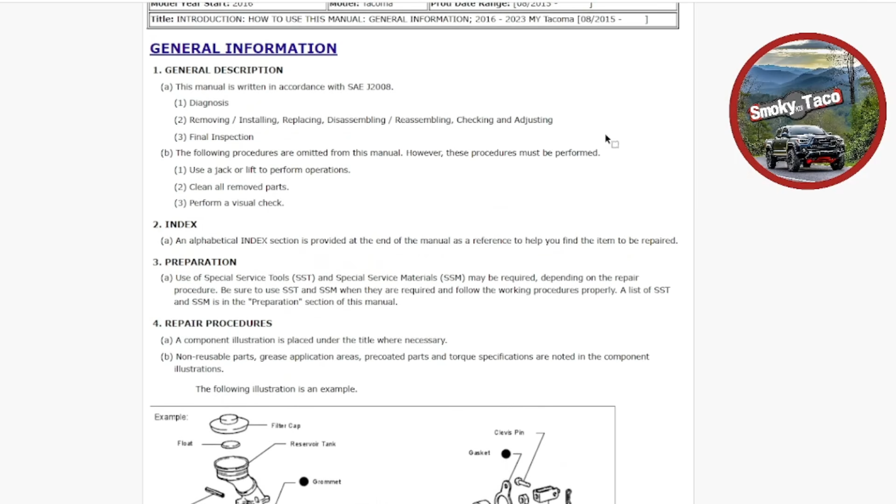If you work on your own Tacoma, this is the tool that keeps you from guessing. This is the repair manual every 3rd gen Tacoma owner should have, and the 4th gen is coming soon. This isn't a summary or a shortcut, it's the real workshop manual.

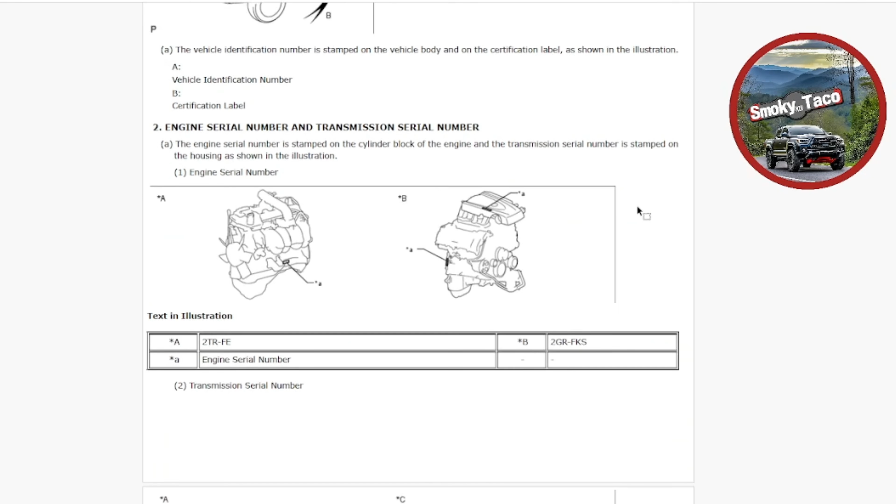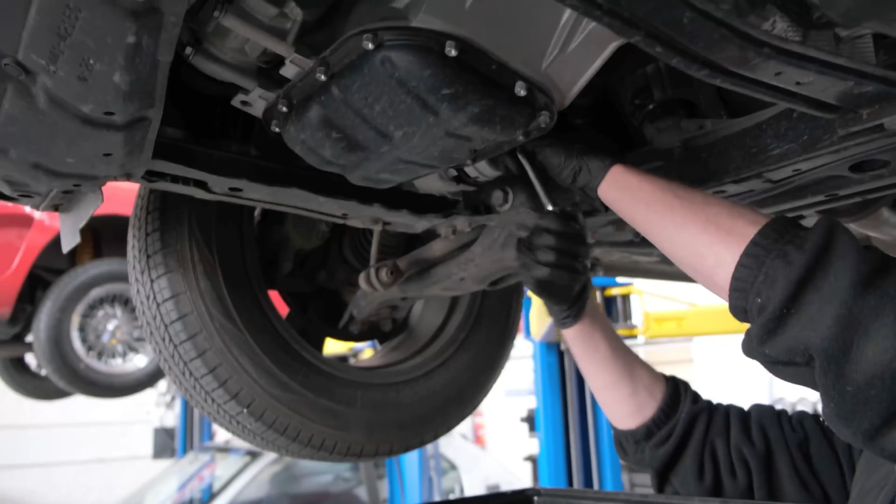If you install mods, do maintenance, or troubleshoot issues on your Tacoma, you already know the problem. YouTube skips steps, forums argue, and guessing costs money. So today, I'm walking through the exact PDF service manual I use to plan jobs, double check specs, and avoid mistakes before I touch anything.

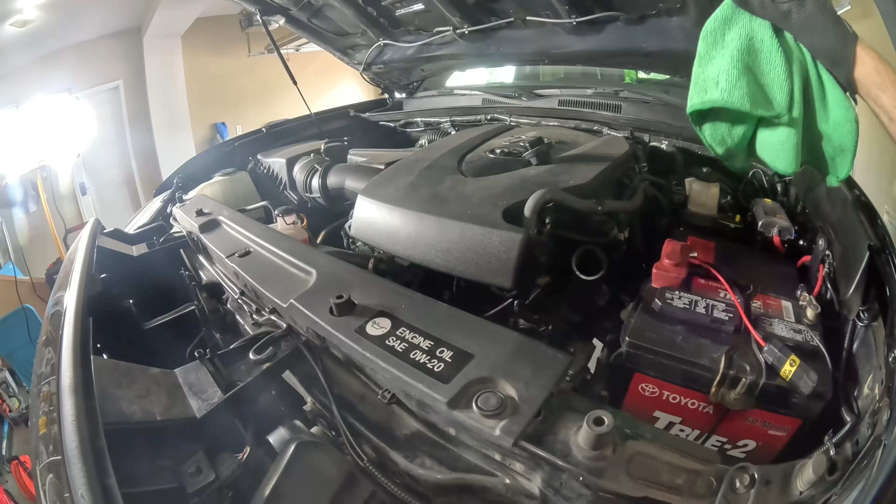This is a Toyota Tacoma service and repair manual from eManualOnline. It's a full factory style workshop manual. It includes step-by-step repair procedures, factory torque specs, electrical wiring diagrams, exploded views of components, and diagnostic flowcharts. This is the same level of information professional techs and dealerships use.

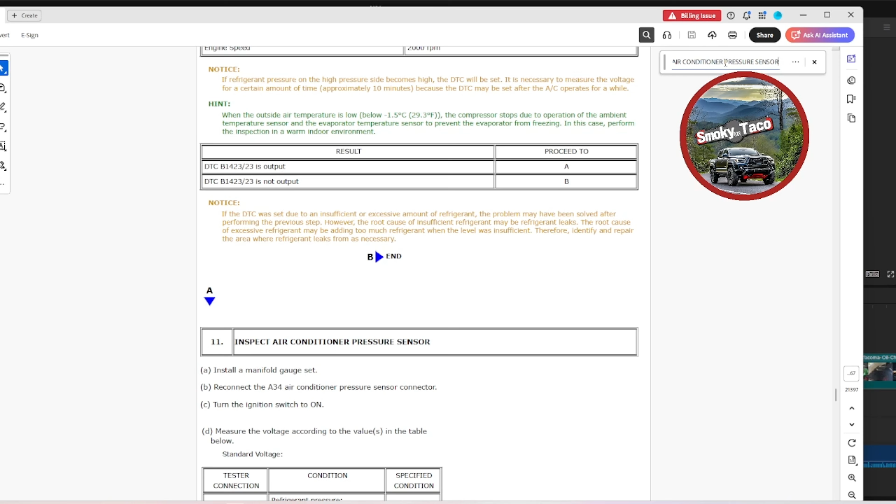Getting it is simple. Go to eManualOnline.com, select Toyota, choose Tacoma, pick your year, and download the PDF. Once you have it, it works on a tablet, phone, or laptop, and it's searchable, printable, and usable offline.

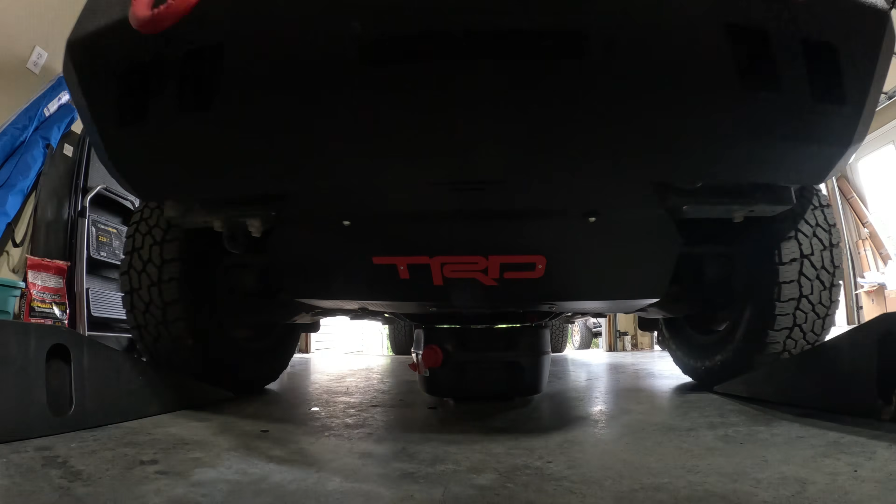Let me show you how I actually use this, even when I'm not actively wrenching. Most mistakes happen before the job even starts. This lets you plan instead of guess.

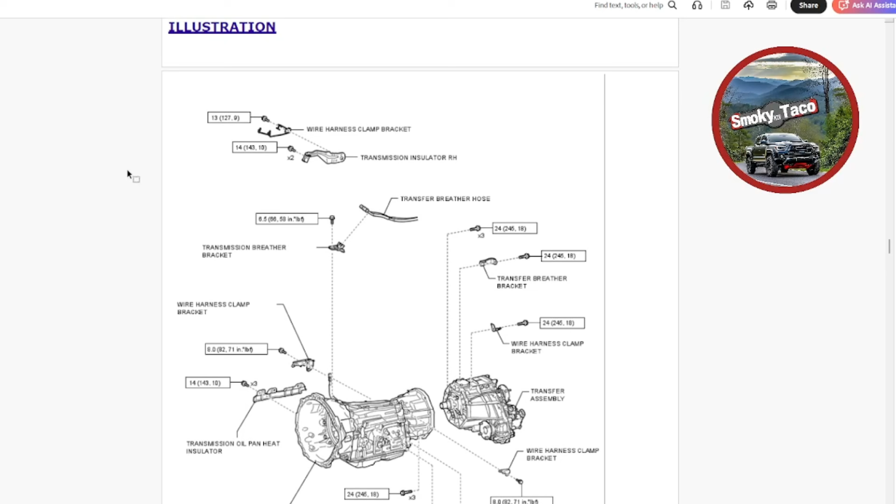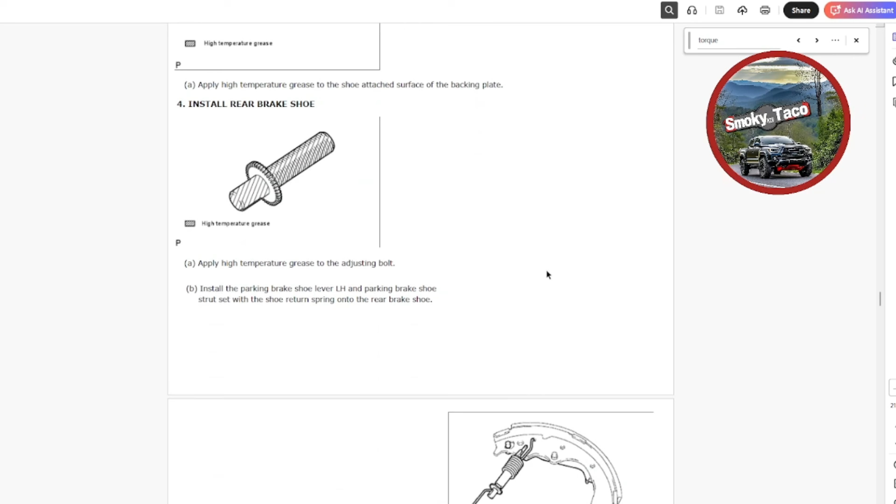I use this manual to plan installs, verify torque specs, understand component layout, and check wiring before tapping anything. This is how you avoid stripped bolts, broken clips, and redoing work. YouTube is great for visuals, but it's terrible for precision.

This manual doesn't skip steps. It doesn't assume. It gives you the exact order, specs, and locations. And when you're working on a modern Tacoma with tight tolerances, that matters. This pays for itself the first time you don't mess something up.

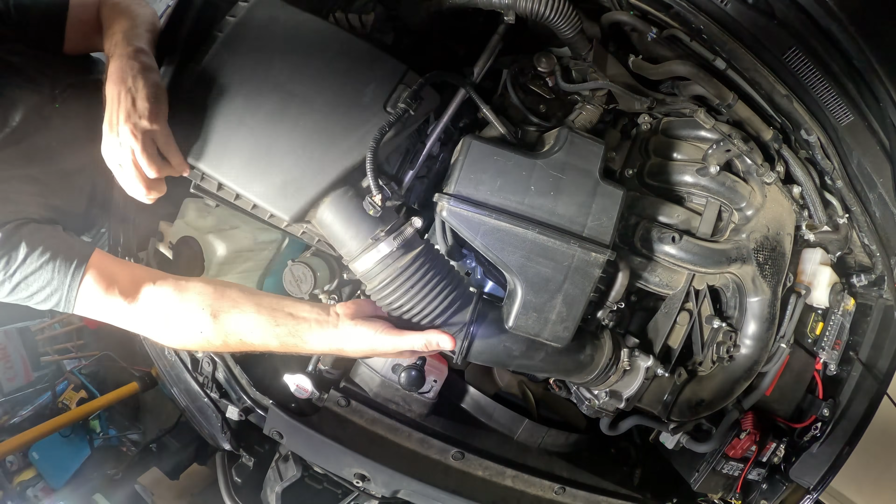This makes sense if you do your own mods, maintain your Tacoma, plan installs ahead of time, or just want to understand how your truck works. If you ever paused a video thinking, I wish I had the factory steps, this is that.